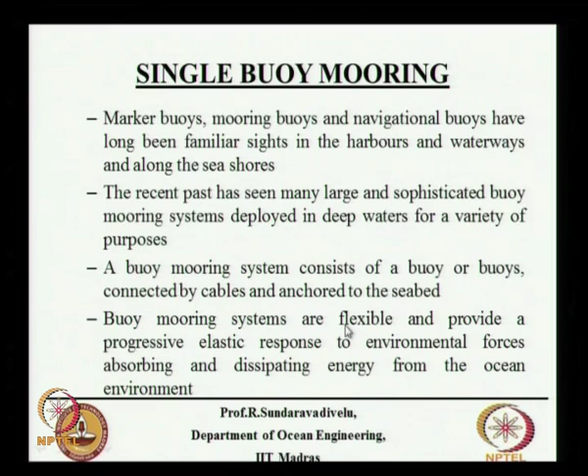Typically the length of the mooring line is about 3 to 10 times the water depth, depending on the sea condition. Normally the water depth is about 30 to 50 meters. This is adopted mainly because of the vessel size. The vessel will have a draft of about 22 meters, and we need more clearance because it is open sea. So the minimum depth required is about 30 meters, sometimes even 50 meters. That means the length of the chain will be about 300 meters.

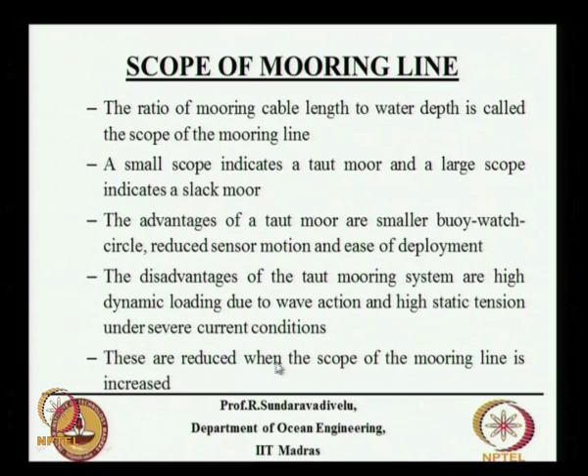If it is a very slack mooring line, the buoy can move like this. So if it is very taut, when the wave comes and it moves up and down, the tension will be very high, that is what is given here. These disadvantages are reduced when the scope of the mooring line is increased.

We can group this buoy mooring system into two categories: one is for scientific purpose, another is for engineering purpose. Scientific purpose is for monitoring or measuring parameters of importance to oceanographers and naval scientists. What are the things you want to measure using a buoy mooring system?

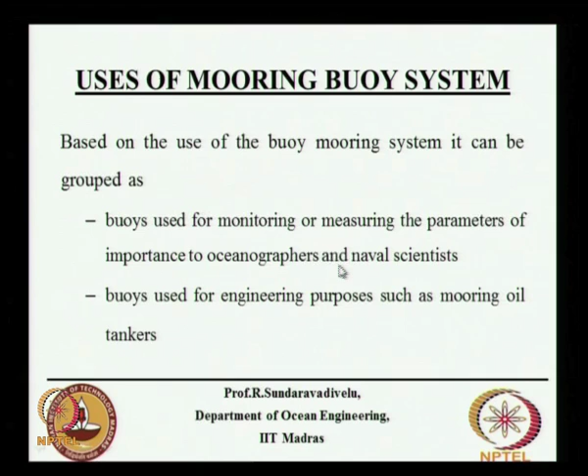Ocean engineering students would say wave height, tsunami warning. But scientists don't need all these things. What do the scientists need? Salinity, temperature, current, all these things.

Sometimes we want to measure the acoustic signals also, this is very much important for the Navy. Buoys are also used for engineering purposes such as mooring oil tankers, that is the second part we are interested in.

There is a book called Berteaux 1976. How many of you are aware of this book, ocean engineering students? Have you seen this book? Have you heard of this book?

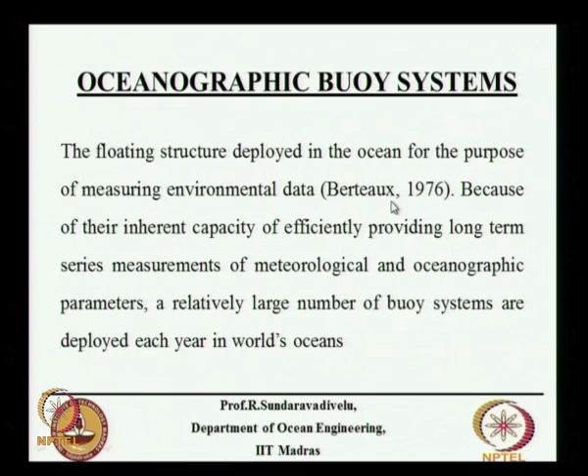Do you know the institute called Woods Hole Oceanographic Institute? You do not know that also, better know all these things. This book is a classical book, it is like a bible for buoy mooring systems. It is available in our department as well as in the main library, a very old book. I think there is an updated edition also.

Then we will talk about the single point mooring system. We call it an offshore floating storage system because we are storing the oil in the mother vessel or a permanent tanker. We call this SPM.

This enables economic transport of crude oil where use of pipeline is not technically or economically feasible because of rough seabed topography or long distances from shore.

Sometimes we use SPM with pipeline also, but in general for a loading terminal we do not use pipelines, whereas for an unloading terminal in India, we place only the single buoy mooring system and lay the pipeline to the shore.

Is it clear? Do you know what is a loading and unloading terminal? Suppose we load the oil from Dubai or some Arabian countries from the offshore location, it is called a loading terminal. We get the oil in the seabed, immediately connected to the riser pipe to the mother tanker and shuttle tanker, and the shuttle tanker moves from Dubai to India.

It either comes to the east coast or west coast, and when it comes to one of these places, it is connected to the single buoy mooring system. From the single buoy mooring system you can lay a pipeline and take it to the nearest land-based terminal.

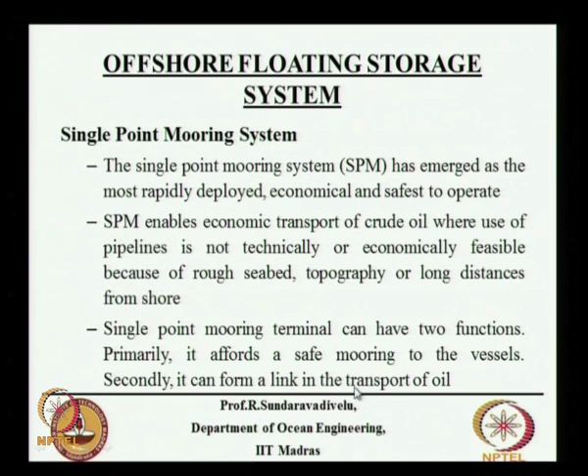We have CALM - they may ask you this question in an interview. Can you guess what CALM stands for? M is for mooring, C is for catenary, and A is for Anchor Leg Mooring - Catenary Anchor Leg Mooring.

What is catenary? It's a parabola shape.

Why that particular name, catenary? If you hang a thread, normally it will have that shape - you've seen spiders? When spiders are making a web, it is also of the shape of a catenary. It is a natural shape which it will take, and any natural shape will have lesser problems.

If it is deep water and you lay a chain, the chain will take the shape of a catenary. It is a parabola only, the equations are slightly different. If you are an ocean engineering student, you better know the equation for catenary - it is available in Berteaux books or any standard textbooks.

There is also what is called a stiffened catenary. Stiffened catenary means at the ends the shape will be slightly different because of the change in boundary condition.

The CALM basically consists of a cylindrical buoy type float. This is anchored to the seabed by a number of radial catenary chain legs - this can be up to 8 chains or even 12 chains - while the vessel is moored to the buoy by one or more elastic synthetic, usually nylon, lines.

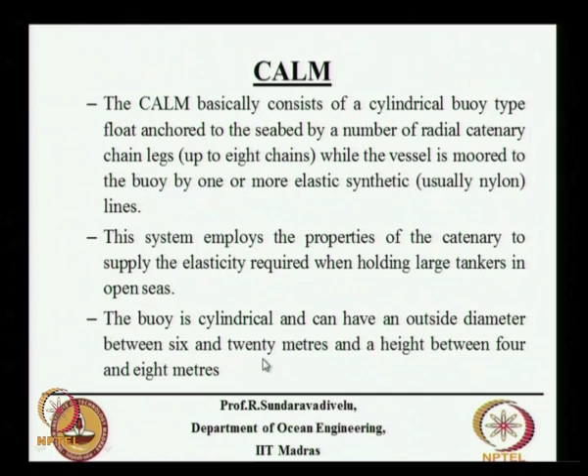They have installed this in the North Sea where the wave height is 28 meters, and there is another field in Brazil with a maximum wave of 21 meters. Brazil is growing because they have a lot of oil potential. China also has self-sufficiency in oil, Russia also has a lot of oil. We have all things except oil - only problem for us is we do not have sufficient oil, that is a very big risk for us.

The current velocity can be a limiting factor. You see 28 meters and 21 meters - imagine what that is. 28 meters is a 9-story building.

When the 28 meter wave comes - I have also done some work for ONGC with a buoy mooring system. When I generate 28 meters of wave in the flume at 1:30 scale or something like that, what I have seen is the buoy simply goes up and comes down - 28 meters means 14 meters up and 14 meters down. When it is going up by 14 meters, the mooring chain which is lying on the seabed gets lifted up.

It will not get completely lifted up. I was wondering why they are giving 300 meter chains for 30 meter water depth. I have physically seen that up to 280 meters the chain will get lifted. Nothing will happen to the system.

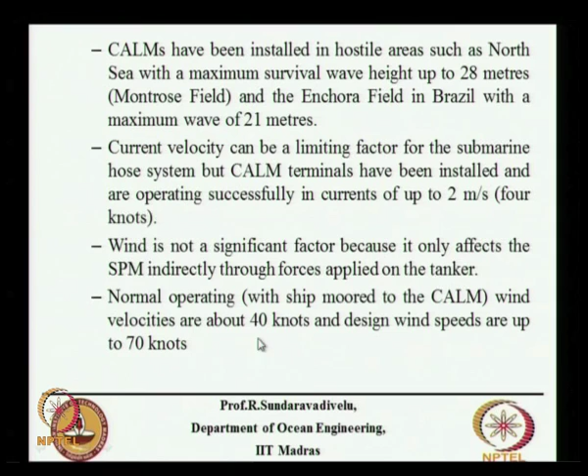Current up to 2 meters per second we can use. Wind is not a very significant factor because it affects only the tanker, the force on the tanker. Normal operating, with ship moored to the CALM, wind velocities up to 40 knots and design wind speeds up to 70 knots can be used.

So we have launched a comprehensive program for exploration of crude oil from offshore resources, with Krishna, Godavari and Kaveri basins where these production wells have to be located about 25 km from the shore. For this type of system, offshore loading systems are particularly attractive and economical for small offshore fields. If you have big offshore fields only, you can lay the pipeline, because the pipeline cost is very high. As the offshore marine environment poses severe demands upon men, machinery and money, the research and development of buoy mooring systems is an immediate necessity for the country.

One of the areas we are working on is to fabricate the buoy mooring system. If you do it yourself, it will always be better. L&T has a facility in Hazira where they have started manufacturing buoy mooring systems. In Kattupalli also they may start doing it. Only thing is, the design of ships as well as the design of buoy mooring systems has not percolated into the Indian market so far.

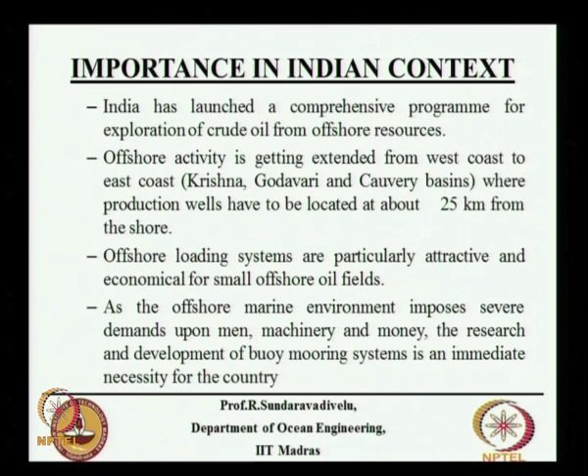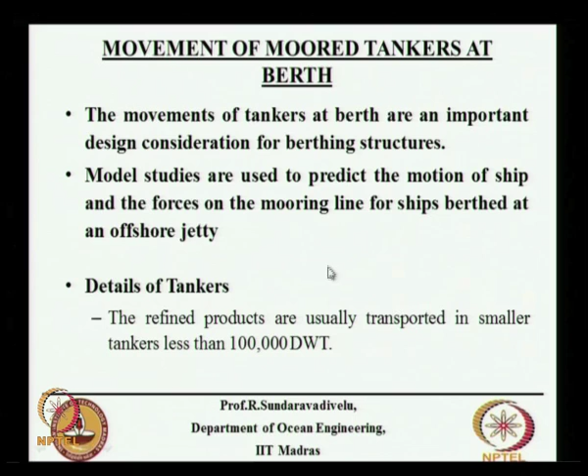For a bigger ship, design is not done in India; even a smaller ship design is not done in India. I will tell you later why it is not done like that. The movement of ships and tankers at berth is an important consideration. This is moored tankers at the berth, which is not related to the single buoy mooring system. Even inside the harbour, if we have the mooring, I think I will discuss this in the next class.